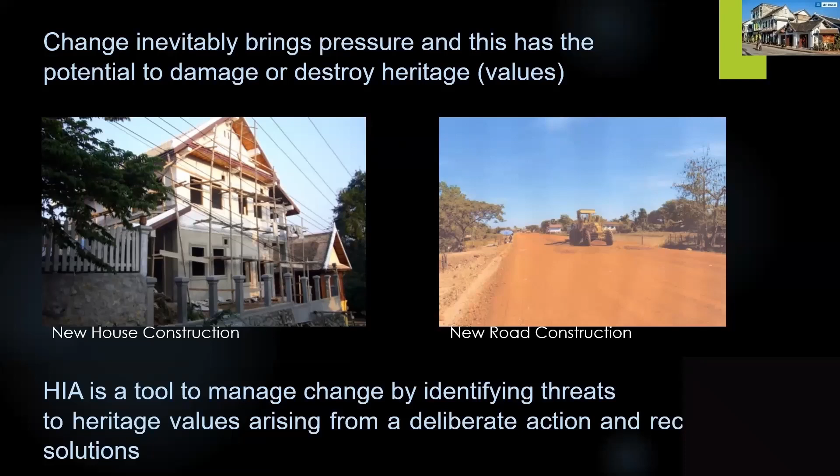What does HIA aim to achieve? Particularly with World Heritage properties, the terms such as integrity and authenticity are prevalent. The aim of an HIA is to safeguard the World Heritage outstanding universal value and heritage significance of heritage sites. It aims to reduce impacts to a level which are beneficial for heritage sites, or if it's negative, to try and remove it and make the impact acceptable.

Most HIAs in Asia are carried out as a result of a requirement from international funding agencies, such as World Bank or Asian Development Bank. It can also come as a request to the state parties from the World Heritage Committee when development is proposed on or near World Heritage sites. HIA can also be part of a statutory EIA process. While most countries in Asia have an EIA system, often HIA is not part of that. Exceptions are Hong Kong and Taiwan, where there's a well-developed HIA system embedded in the EIA.

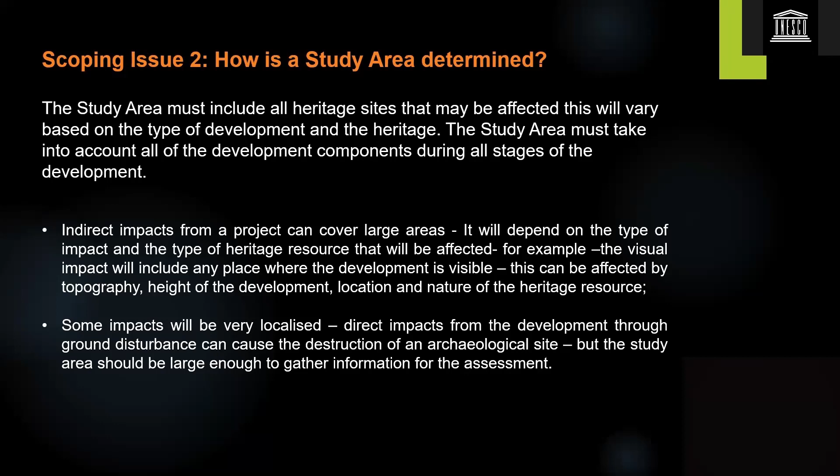Although scoping reports are often drafted by HIA practitioners, it is important to identify what expectations the Heritage Authority has from the Heritage Impact Assessment. This is a clear message to the project proponent, but also to the HIA team, which will implement the assessment. So the scoping report should include whether surveys are required and whether the existing data is sufficient to make an assessment. It needs to define which heritage will be included in the HIA and their possible legal status.

So what type of information would be required to undertake the HIA? And this again harks back to the finances. If the scoping report doesn't identify that, for example, a LiDAR survey is required, then who is going to pay for it? The scoping report may also include, in a very tentative way, what impacts are possible, and during which stage, and what should be highlighted in the ultimate HIA report. Finally, the scoping report needs to identify who should be on the HIA team.

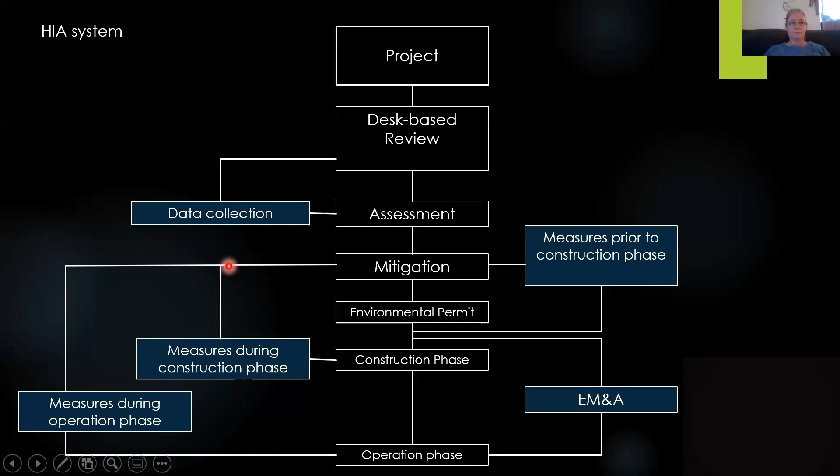Once there is sufficient data, we can move on to making an assessment of the project on heritage and recommend possible mitigation measures. Now, mitigation measures can be implemented prior to the construction phase, during, or after, during the operational phase. So it leads the HIA implementation to an environmental permit. And an environmental permit is something that has to be issued by the Heritage Authority before the construction can go ahead. We'll come back to the other elements in the flowchart later.

The quality of a heritage impact assessment is largely based on its baseline data collection. So this step is really essential. So initially we identify what type of heritage, location, descriptions, conditions of the heritage, anything pertaining to the significance of the heritage is collected in the baseline study.

But also we have to understand what is the project. Is there a need for this project? What's its area of influence? What type of works are proposed or will be undertaken? What type of machinery does that involve? What's the design of the project and its possible impact on heritage? Because all this information regarding the project and the heritage will ultimately lead into evaluation of heritage significance and the identification of impacts and assessment of the project.

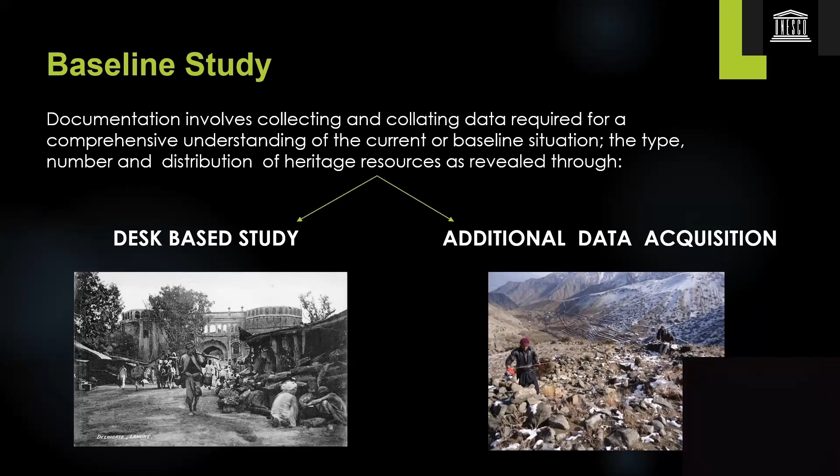It will ultimately recommend mitigation measures where possible and include a monitoring and audit program to be implemented after the environmental permit has been issued. The baseline study includes documentation, collecting and collating to understand the current baseline situation within the study area and for the heritage. So type, number and distribution of the heritage resources as revealed through existing information and possible additional data acquisition.

Existing information can consist of historical documents, secondary works, environmental, ecological, geological, geomorphological information, ancient and modern map collections and studies of these, historical photographs, archival documents, previous archaeological, built heritage or landscape studies, published papers, and so forth, existing catalogues and inventories and project reports and previous or related assessment reports.

If the existing information is found lacking, then additional data collection may be required. It will be conducted to fill in any gaps in the database and expand where needed using things such as archaeological investigations, built heritage or landscape surveys, and interviews, collection of oral histories. So the baseline study should be detailed enough to provide a project baseline against which the monitoring results can be compared. What was the significance of the heritage before, and has this been safeguarded now that the project is up and running?

Once we report on the baseline study, we should identify where there are still gaps in the data and why these gaps could not be filled. There was no time, there was no access, there was not enough funding. We should also identify during data acquisition if there were negative results. So this is an area where the survey did access but found nothing, and so this negative information also helps towards the assessment.

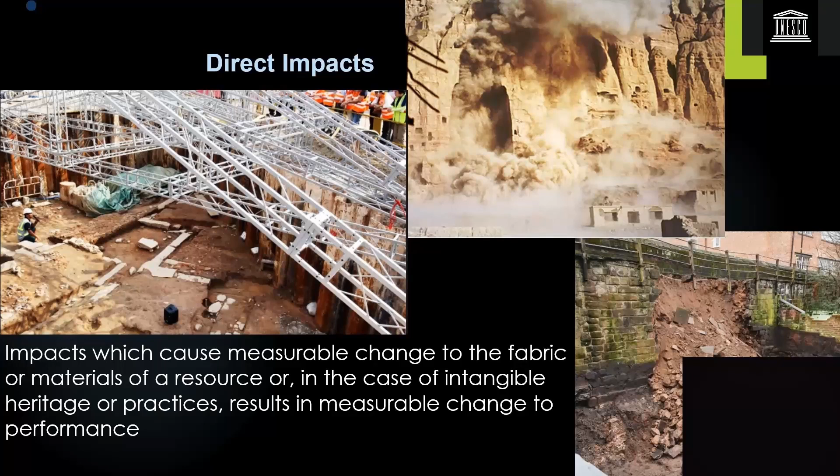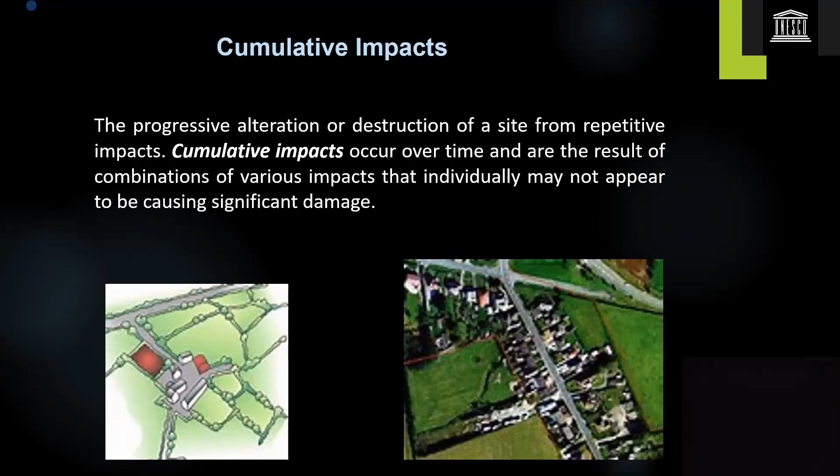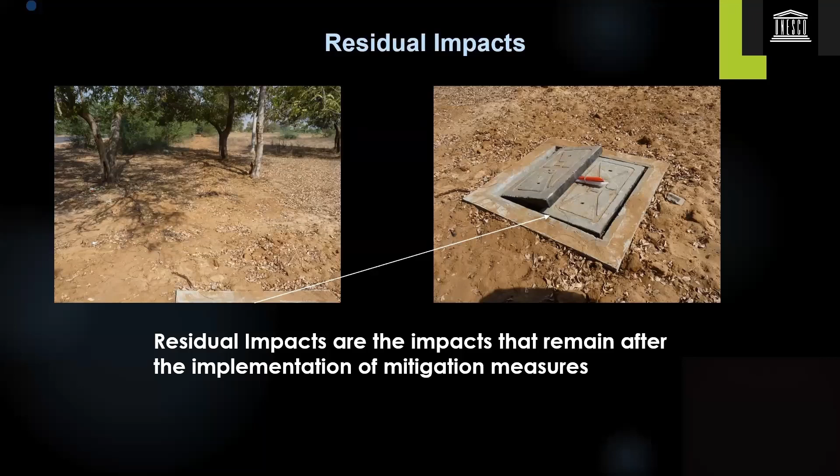Residual impacts are impacts that, after the mitigation measures have been implemented, still remain and cannot be taken away. But residual impacts are so minor that they are considered to be acceptable in most cases. So just to summarize, residual impacts are impacts that remain after the implementation of mitigation.

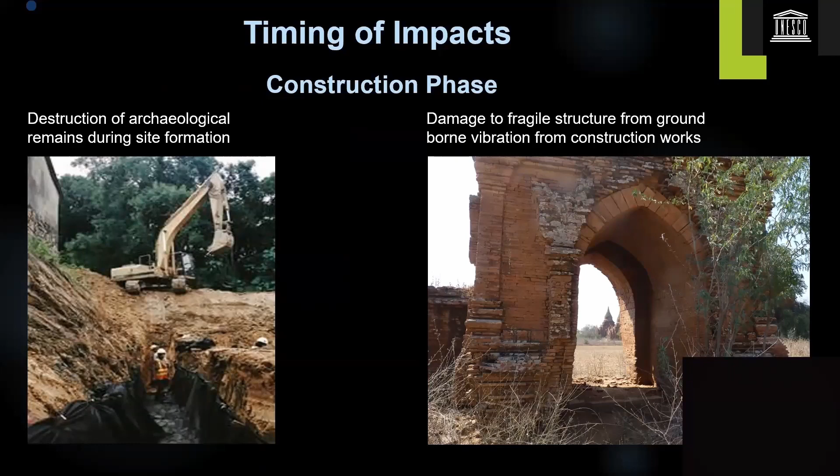So after the type of impacts, we consider the timing of the impacts. So some examples here of construction phase impacts on archaeological sites and built heritage. Impacts can occur during the operation phase, in a sense where tree plantations have an ongoing impact on archaeological deposits, or the construction of a modern tower amidst a cultural landscape continues to have visual impacts on this landscape.

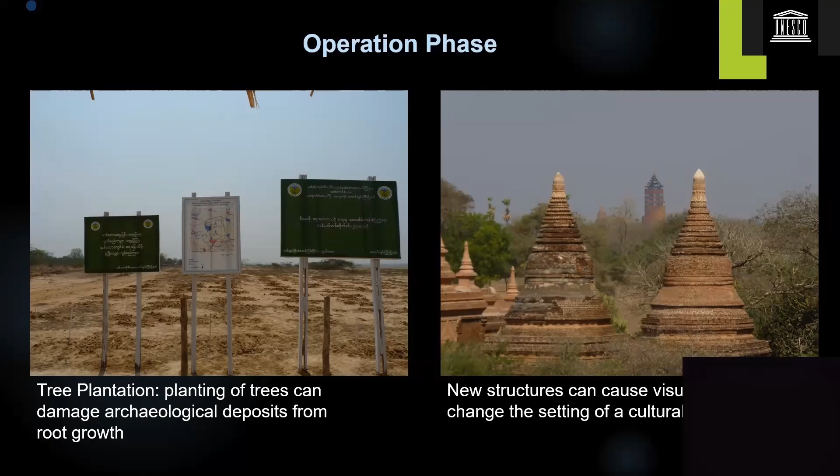HIAs are not only conducted at the initial stages of a project, they can also come at decommissioning phase. So once a facility has reached the end of its useful lifespan, it will be vacated and possibly removed. During this removal, it may include further excavation of soil or building demolition works. Some of the examples we see here of machinery employed in decommissioning, or the revealing of archaeological structures during the decommissioning of an old airport.

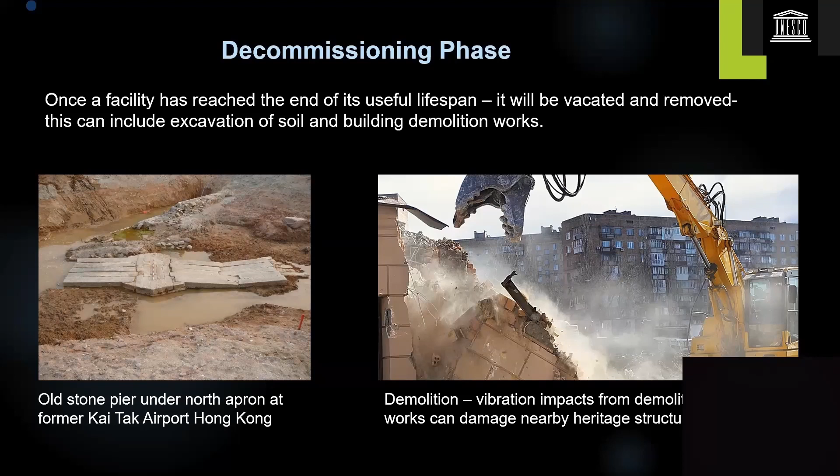So we've identified the types of impacts, we've identified the timing of the impacts. We will also look at the duration of impacts and then come to an assessment. So what we are hoping for is that the project will have a beneficial impact on heritage. It happens. In this example that we're seeing here, the construction of a retaining wall, which prevents river erosion, actually protects a Pyu monument from further erosion. So the impact is beneficial if a project will complement the setting or stabilize or enhance its function or accessibility or improve the maintenance and management of a heritage.

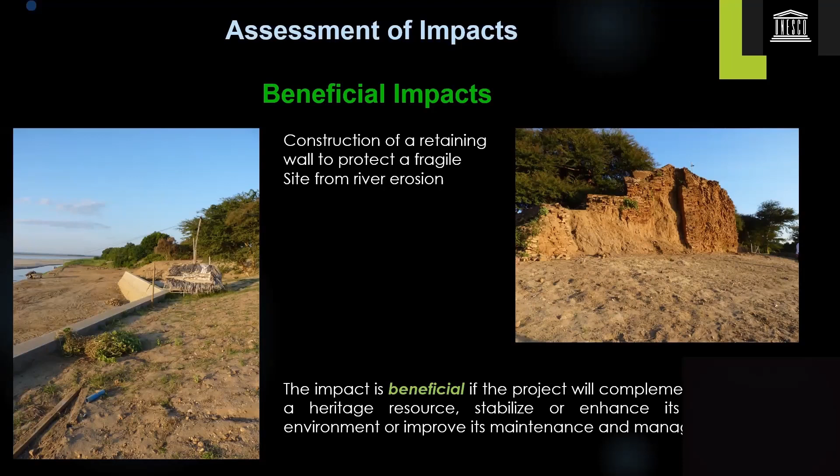So an acceptable impact consists of an impact which is neither negative nor positive for heritage. The assessment indicates that there will be no significant effects on the fabric, setting, or value of a heritage place, and/or the function and performance of intangible heritage. The examples used here are the resurfacing of a road, which just keeps the status quo of the area around the heritage, or the operation phase of a fiber optic network, where we see some residual impact, but really no negatives on the heritage.

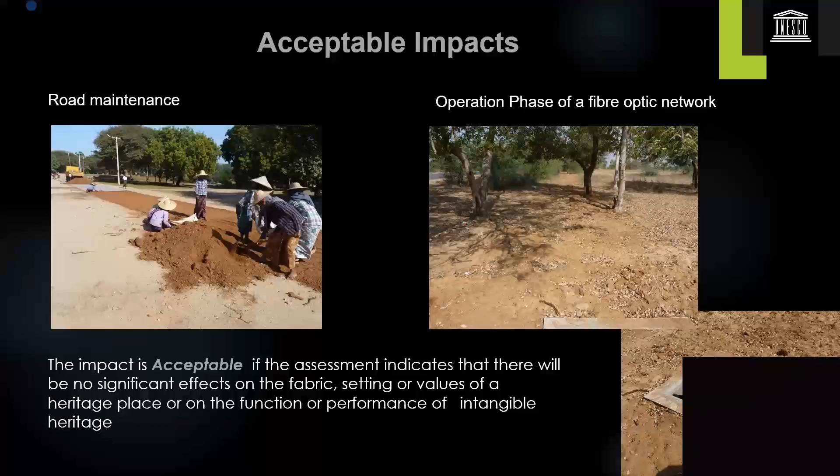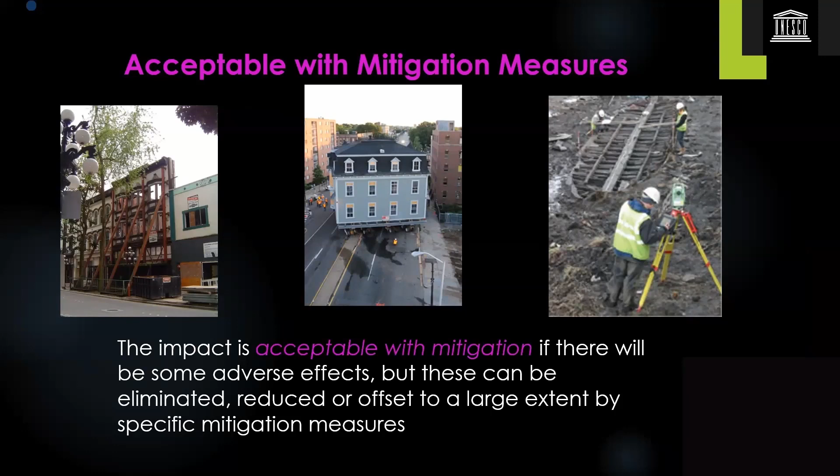Most commonly, though, we will find that the impacts are acceptable with mitigation measures. So impacts are acceptable with mitigation if there will be some adverse effects, but they can be eliminated, reduced, or offset to a large extent through specific recommended measures. So mitigation is required for all impacts that are defined as acceptable with mitigation. So we do not recommend mitigations for acceptable impacts or unacceptable impacts, for instance.

So mitigation can be applied during any of the phases of the project, whether it be construction, operation, decommissioning, or even a planning stage. Mitigation should be recommended with the immediate and long-term safeguarding of the heritage resources in mind. It has to be realistic and provide viable alternatives. Examples of some archaeological mitigation measures are an archaeological watching brief, which is typically conducted during the construction phase, or preservation by record of the archaeological data, which is something that would be recommended prior to the construction phase.

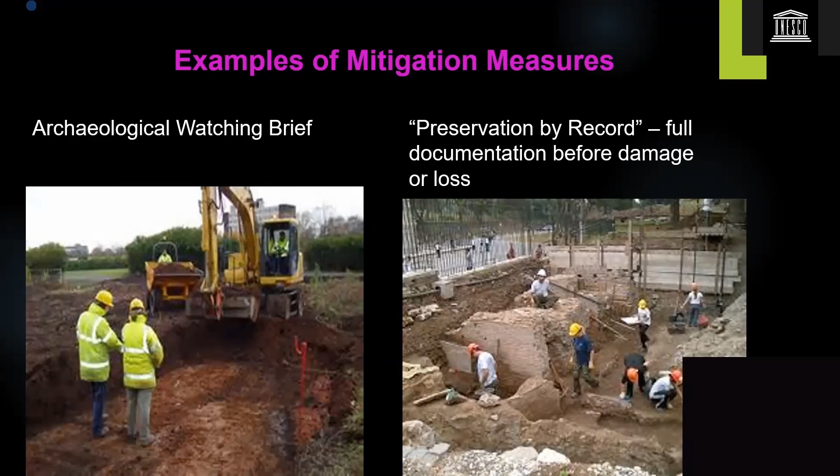Some examples of built heritage mitigation measures are, for instance, during the design stage, the built heritage is incorporated into the development, or during the construction phase, where we see measures undertaken to ensure the stability of the built heritage resource.

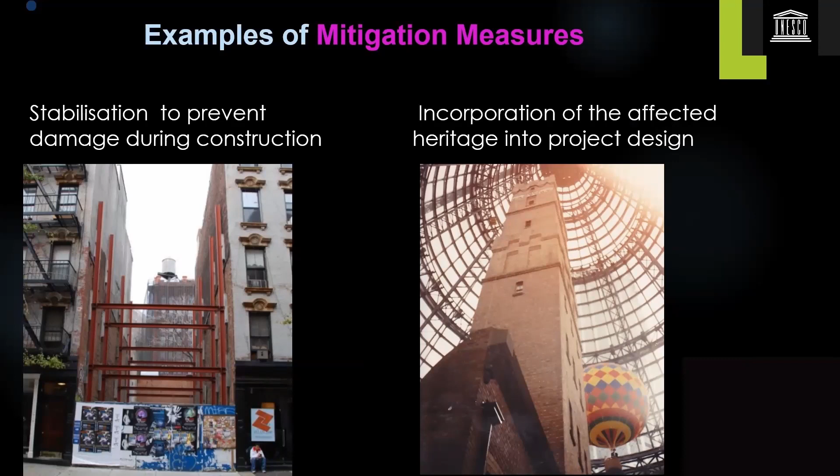So how is mitigation implemented? In the HIA report, we will include details on the mitigation measures: what needs to be done, when does it need to be done, where does it need to be done, by whom. So it will be very detailed and very specific, so everybody involved understands what is expected and what is accepted. The party responsible for ensuring the mitigation measures are being implemented is the Heritage Authority, and that will be conducted during the monitoring and audit stage.

So monitoring and audit. If mitigation measures are required, they have to be implemented, and the implementation needs to be ensured. It's often the Heritage Authority who monitors the mitigation measures implementation, but sometimes it can also be an expert who then reports to the Heritage Authority. So this monitoring is a process of regular observation, recording and reporting of the activities recommended in the HIA report.

So this happens in the field to ensure compliance, and these mitigation measures are written into the construction and operation contracts, and as such will be effective. So the monitoring and audit process is necessary to determine the project compliance with the requested requirements and standards. It's to verify that the predicted impacts are mitigated. It is to ensure the effectiveness of the mitigation measures, but also to take remedial actions if there are unexpected problems or unacceptable impacts arising.

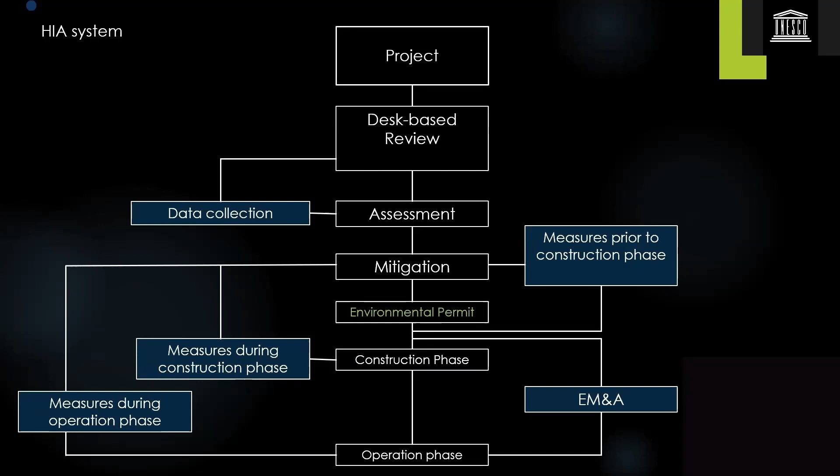So quickly, because my time is running out. We again have the flowchart for the HIA system, and the aim for the HIA report is to get to an environmental permit. This flowchart shows the HIA process and who is responsible for the various steps of HIA implementation. So we start with the application of the project by the project proponent. This, of course, is at screening stage, and it's here that the Heritage Department decides that an HIA is not required or that an HIA is required.